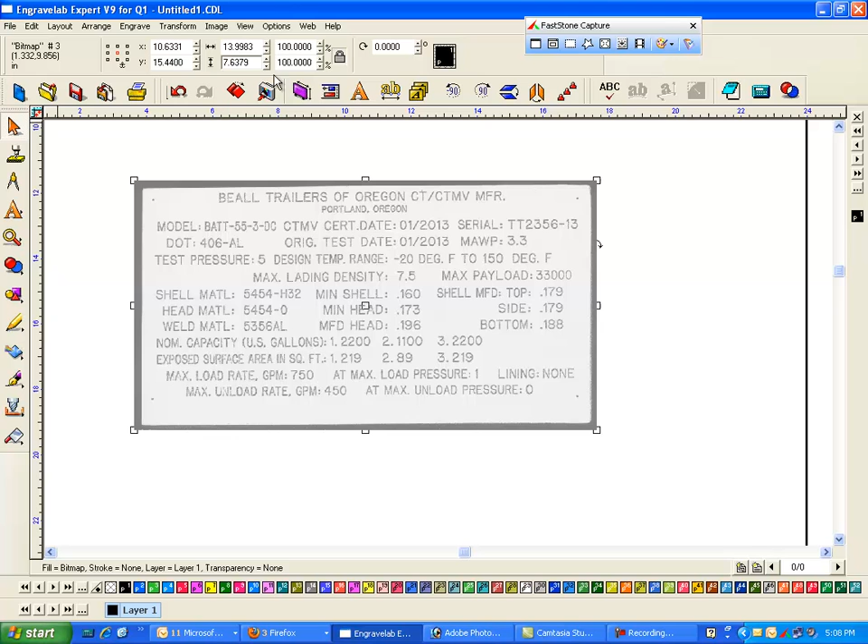I can kind of see, I'm going to get my magnifying tool here, and I'm going to make it about what it's supposed to be. I can see I'm a little bit over, so I'll make it 4.5. Let me not do it that way. I need to change this so that it's locked. So 4.5 and enter, and that is 4.5 by 8 1/4.

And you can see I've got a little bit of margin out there. And now here is a box that I created. And if it might be easier, what I'm going to do is just move this all up.

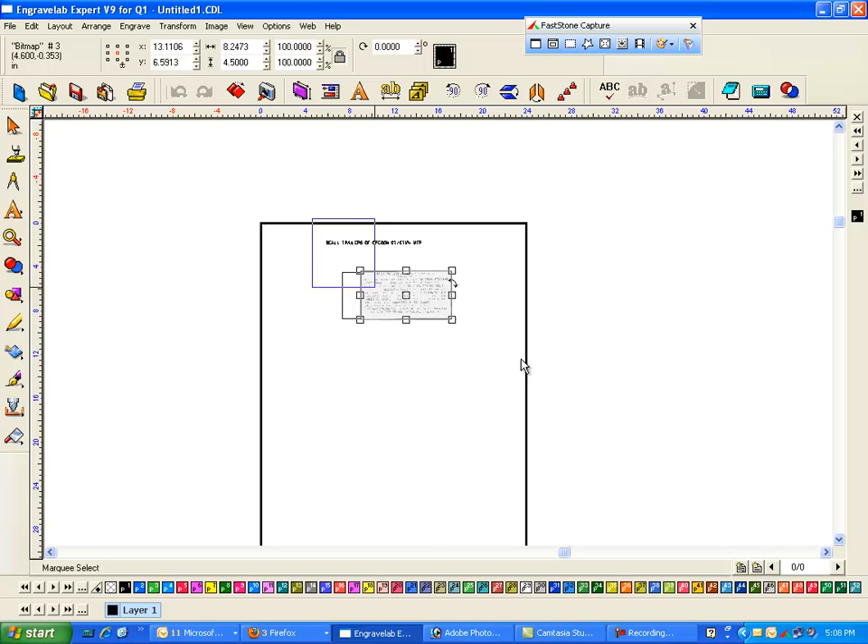And I'm going to start with a plate size layout. Plate size: 8 for width and 4.25 for height, and say OK. So here's my plate. I'm going to zoom out a little bit,

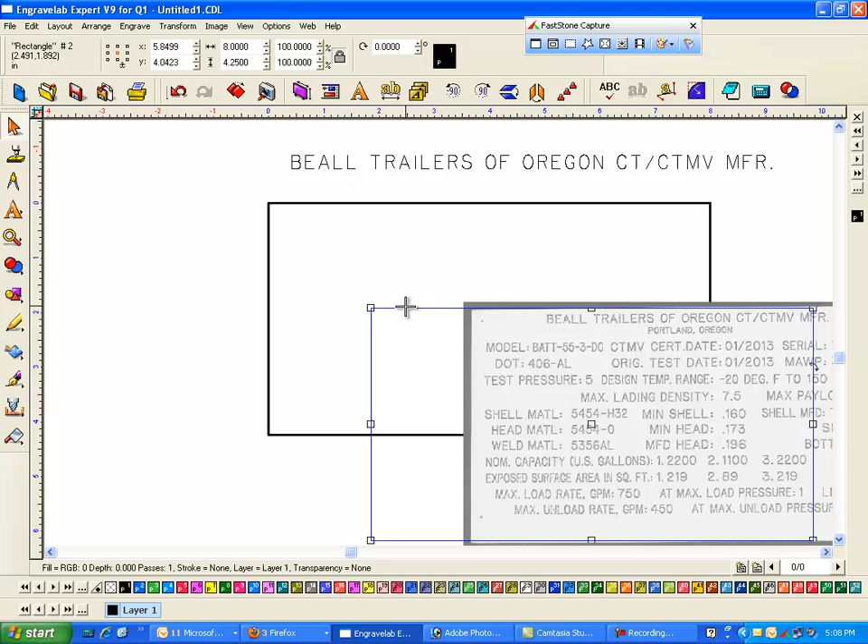and I don't need this box any longer. So here's my tag.

And if I wanted, let me go ahead and go to layout and plate the object so I can see, and I can go to Arrange, order, send to the back, so that now I can see here's my plate size, and then here's my, and I'm going to use my arrow keys to get it in there.

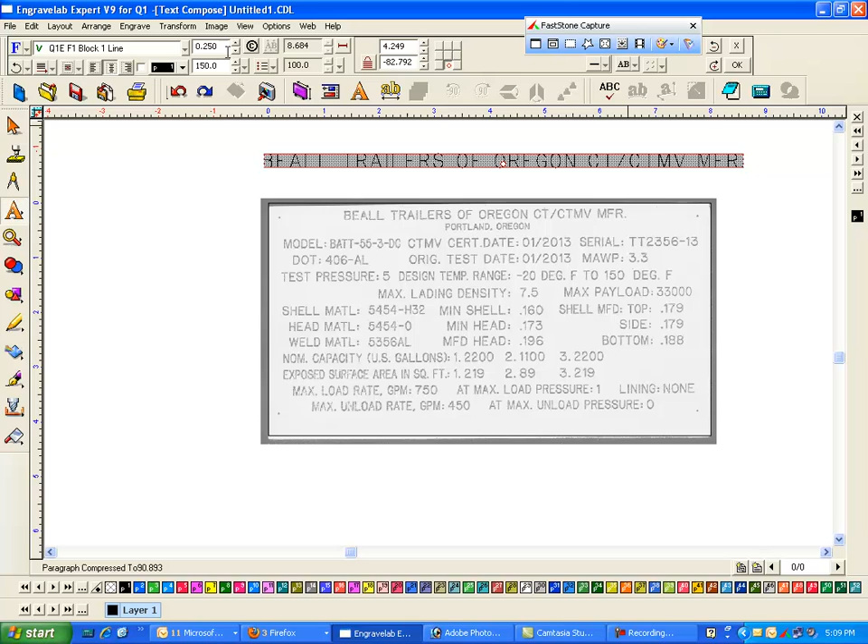Now I've already typed this in, but this is just, I typed in text, and you can see it's quite a bit too big, so I'm going to double click on the baseline, swipe through it, and maybe make this 188, hit enter. And you could measure your exact text, but it looks like it's actually going to even be smaller than that.

Swipe through this and make it 1/8 of an inch. And if you wanted to, you can kind of zoom in here, and I can make it proportionally bigger, or I can just go here, right mouse click, and just maybe make it 0.15 to see what height it is.

So that was probably the height that they used. And my text is a little bit straighter than the text that's on the screen, and if I wanted to, I can kind of compress this in. So here's my text. This is what I'm going to be engraving, and we'll center a lot of it later.

Now I'm going to type, and this is why I made it gray, so you can just type right over it. I'm going to type in Portland, comma, Oregon.

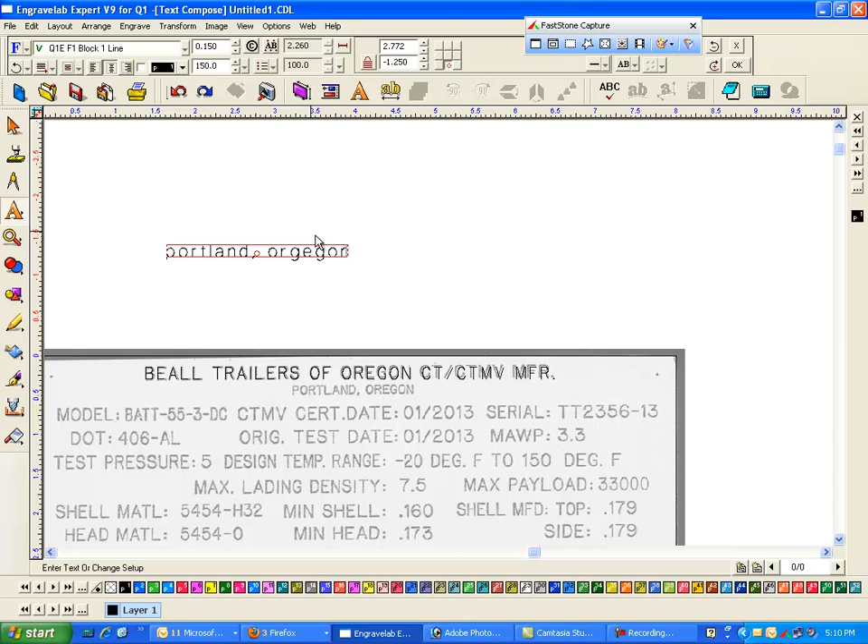And I'm going to swipe through this and go to, close that, I don't need that, go to here and make it all uppercase. And this is going to go down here, F7 to zoom in on just that.

I'll hold the shift key, I'm sorry, the control key, the alt key, and it makes it proportional scaling. And looks like it was condensed a little bit.

And the fonts are going to be a little bit different, but you could space these out. Let me just see if there's a little bit of space in here that I left too much. No.

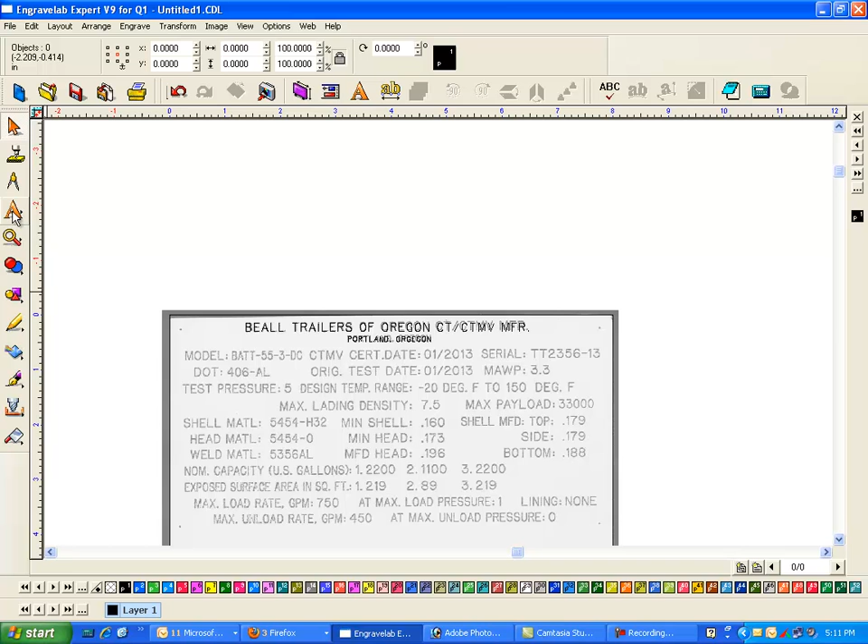Okay, so here's your first lines of text. Now on your next line of text, of course you could get the measurements from the other program, but I'm going to put in another line of text.

I'm going to put this model in, M-O-D-E-L, and I guess I should just put the caps lock on. I don't have to screw around with this, all uppercase. And here's the word model, and I just compressed it just a little bit.

Now, I am guessing that this value, model, is going to stay the same, but this is going to be a variable. So I'm going to just type in, if I want, I can just go right here, and I can duplicate this. I'm going to go under Options, EngraveLab Setup, General Preferences, and I'm going to make this X offset 1 inch, and say OK.

And the other thing that I want to do on this text is I want to make sure that it's left aligned, which it is, which it was not. So I'm going to move it over.

So now it is, in fact, left aligned. I'm going to hit Control D to duplicate it, and it moved it 1 inch over. Now I'm going to double click on the baseline and swipe through this, and because I can't see it, I'm going to double click on the baseline and swipe through it again.

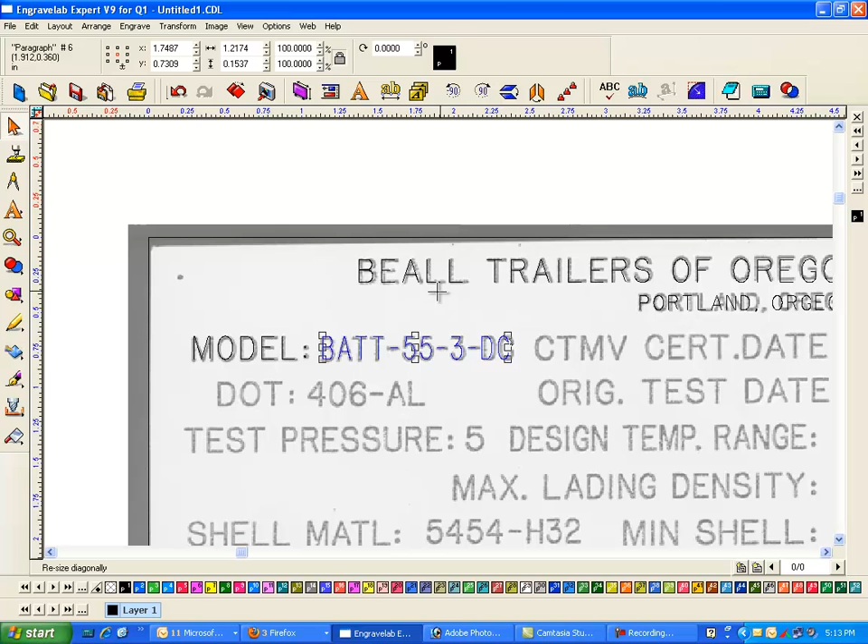Put my caps lock on: BATT-55-3-DC. And again, I'm going to compress this down a little bit and bring that in. Okay, so this is going to be the text. I'm still on the same baseline as what I put on over here, so this is going to be a variable text that's going to be available to you. So I'm going to hit Control D again, and actually it's not on the same baseline. I have to type it in.

And this is, I'm going to double click on the baseline here, swipe through it: CTMV. CTMV CERT period date. Cool.

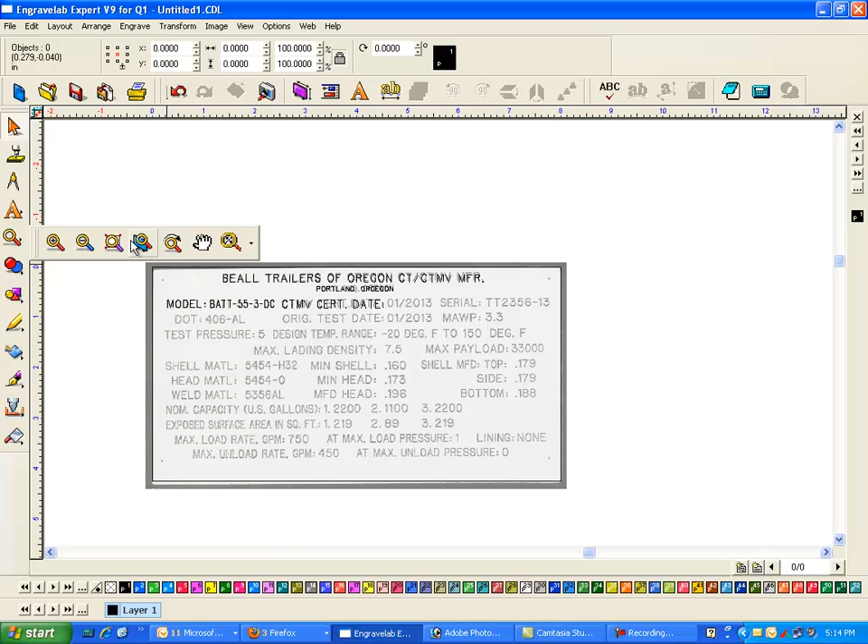So by a process of putting these variables and boilerplate information, you can go all the way across the sign. Now once you get these all set up, what we can do, let's go ahead and zoom in. I could have hit F5, and I'm going to get back and go to a blank area on the screen and right mouse click, and I'm going to put guidelines in.

So I'm going to start with one right here. It really doesn't matter, and click on Add. And right now they're locked, and I'll say that they're not to be locked. So here's a guideline. I'm going to double click here, and I'm going to add another one: 88. Add. 0.94. Add, and then just say OK.

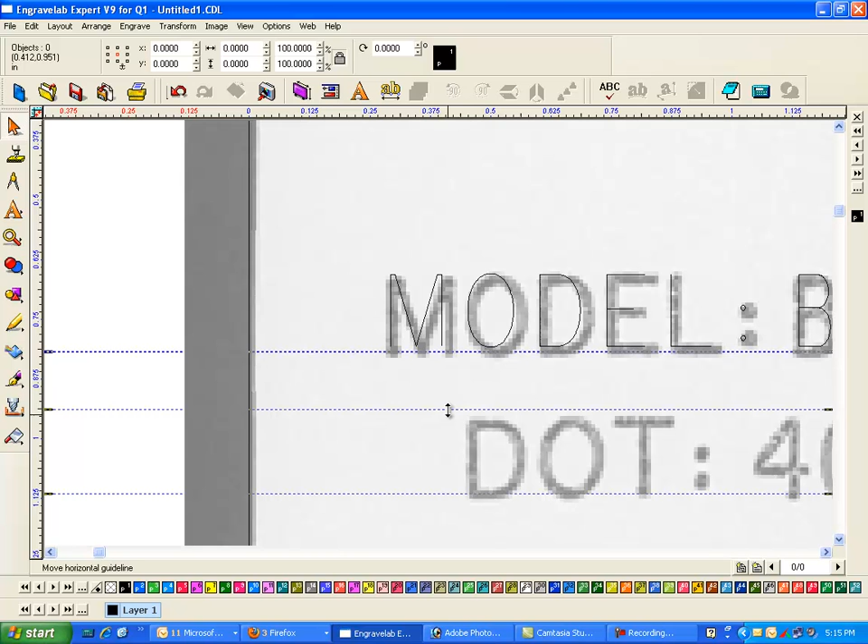And this is going to be my baseline for the model. This one's going to be the baseline for dot, and then I'm going to drag this one down here. And if you know what these baselines are ahead of time, it makes it all the much easier. So I'm going to hit F6 to zoom out. So you could put these baselines in ahead of time.

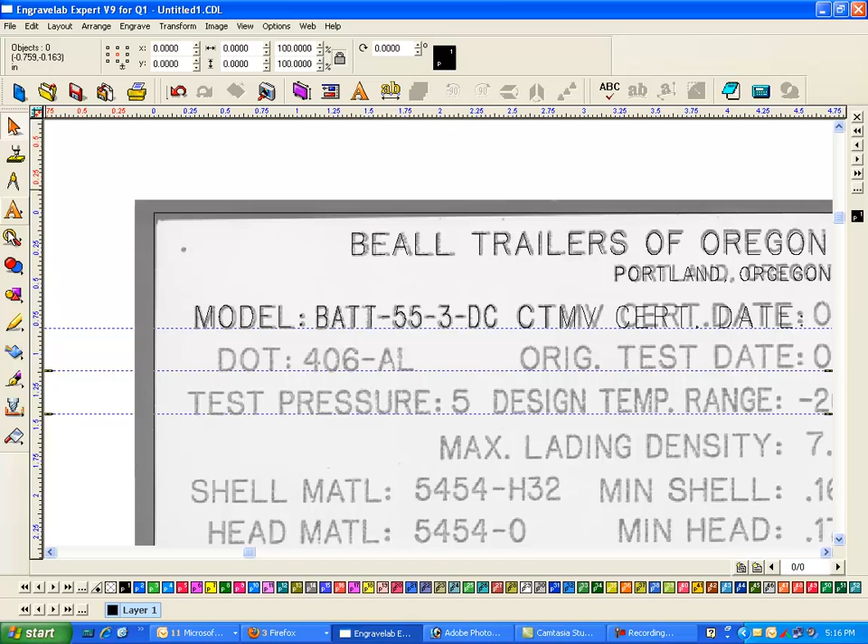Now, usually what I do is I right mouse click in an open area, and I lock the guidelines and then say OK. So now what I'm going to do is I'm going to look here, and I'm going to purposely take this and move it right at the baseline. And what you want to do is get a straight letter that's on the baseline. So here's the lowercase, or get the B right on the baseline, and now all of these will be perfectly set. This one's already perfect there.

Go across the CT. The bottom of the C would not be a good one. You go to the bottom of the T or the bottom of the V or the bottom of the R would be where you would, and the bottom of the E - you can see how that's right on that baseline.

And then you just continue to type in text. You just hit Control D to duplicate it, bring it up here, double click on the baseline. This could be, if you had it in Notepad, you could have all these already pre-typed in, but 01/2013, and then this is going to be information that you're going to put down here.

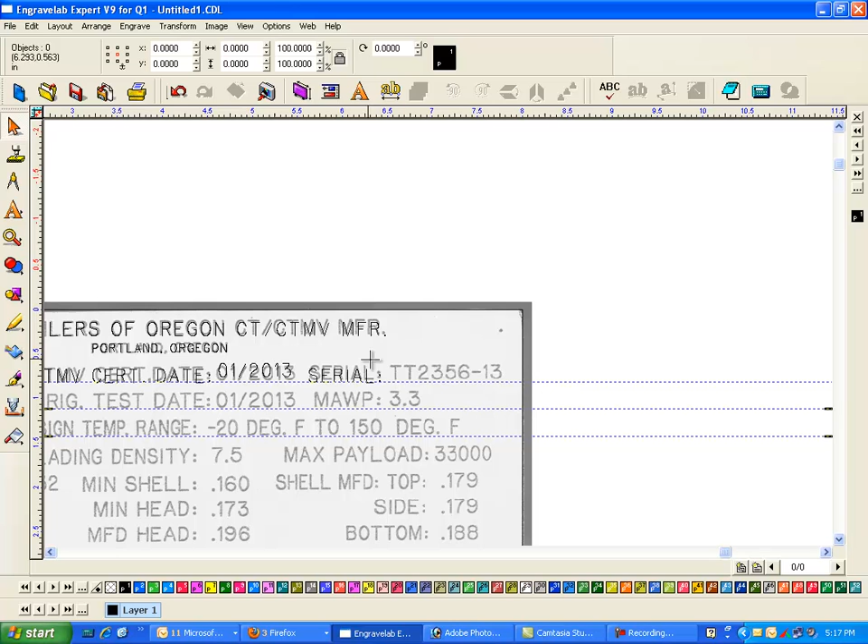You're going to have another string of text that's going to be serial. SERIAL, and so forth. Drop it down to the baseline, scrunch it up a little bit, and remembering that this artwork is a little bit crooked - you can see how it's tilting up.

You can take this and maybe twist it maybe 0.5 degrees to bring it back in line a little bit closer, and then you're going to just bring your text down, and you can see pretty easily how you can get this all lined up in a fairly short period of time. Now, once you know that you have a set of variables...

Then what you're going to do is delete - let me go F8 to zoom in on everything. After you get this all typed in, all the stuff that's going to stay, that's boilerplate, you could select it all. So here's this going to stay boilerplate, the serial. I'm holding the shift key down. You've got to be kind of careful with that bitmap behind it.

So these three items are all going to stay exactly where they're at. Only thing that's going to change is the serial number and the model number. So I can hit Control G to group it, so that from now on that number will stay. And then you just continue on down the line.

If you know your spacing, you could start by putting all these guidelines in. If it's going to be perfectly spaced text, you could type it in that way. But on something like this, because you've got these variables changing, you need to allow for those to change.

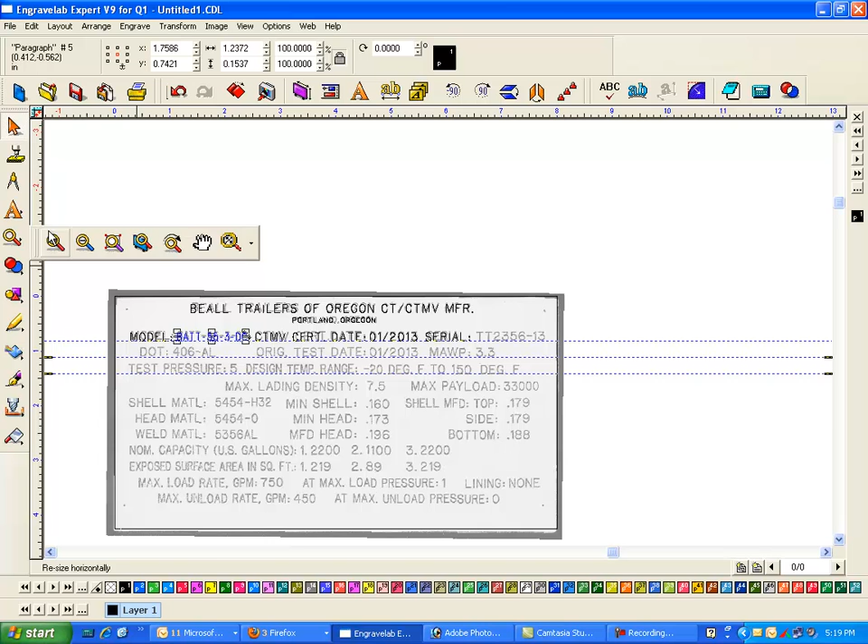Now keep in mind, with EngraveLab, you could have a text file, so you could go in and change each one of these. You could have 7 or 8 different variables that you use in an Excel spreadsheet in order to create this variable for the next tag, rather than going in on each one and looking at this and saying, okay, on this next tag it's going to be BAT56-3DC. You could do that in a text file. Hope this helps.